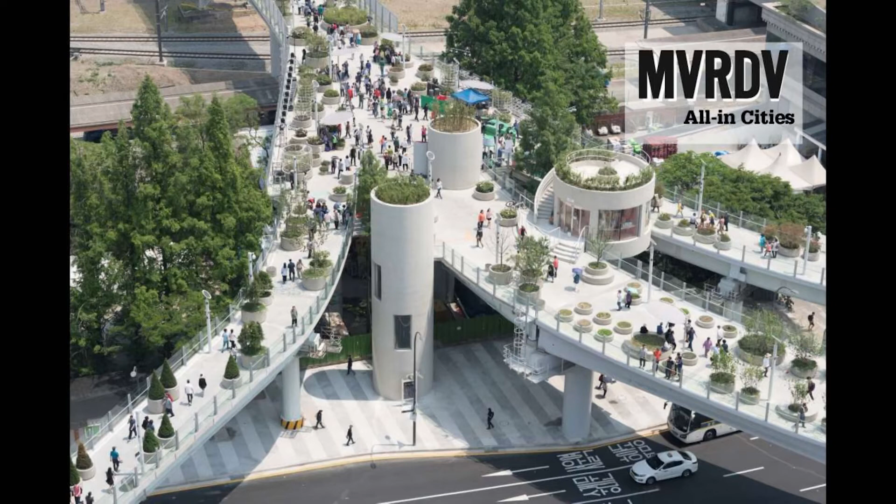Hong Kong is a world-class city, and the greatest cities in the world offer more qualities and more fundamental values that go beyond economic performance. So it's also about well-being, it's also about happiness, and this is something you have achieved.

Hong Kong already has the longest living population, the healthiest population—also extraordinary, at least for guests of the city; maybe you are used to it. You are also the most walking people. It's maybe not the most walkable city, but you use the benefits of the compactness.

But you want to take a step further, and that's part of this discussion today. It's not only about people living longer, but people being happier. It's very inspiring what is the title of the conference—it's about action, so it's a call for action. And a call for action is also a call for optimism.

When we talk about optimism, it's good to think about the impact small things can have in our society. We can fix our traffic lights, because it seems they are timed for Olympic runners. We can have more benches in the city, find places for more trees to generate microclimates, and make it more recognizable where the pedestrian way is. It's these small things that can make a difference.

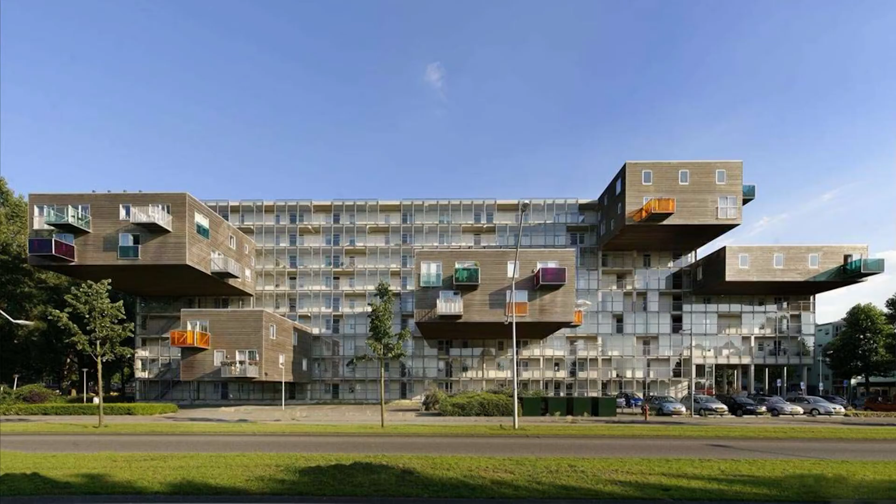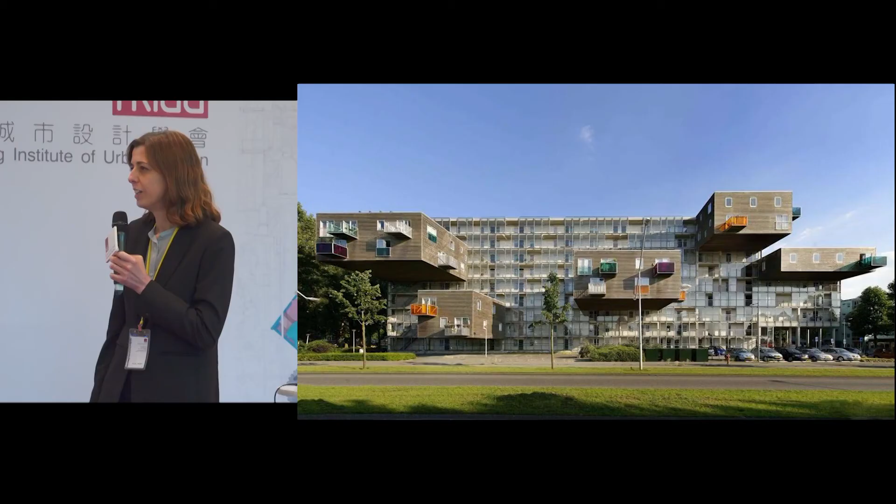This is one of our first built projects in Amsterdam, an elderly house. Many people will think it doesn't look like an elderly building. Why does it have this form? Actually, it's thanks to—or because of—the urban regulations.

First, we had a slab. The client asked us to include 100 apartments in a building for seniors. But if we wanted all these apartments to have daylight and sunlight, we had to cut part of this building envelope, so we had 9 units less.

We also wanted a larger access so it could be flexible, with activities happening there, so another 4 units went out. At the end we had 13 units less, so we proposed to the client: what if we hang those units onto the slab?

So it's looking at the regulation with creativity, trying to solve it—that's how this building came out. It's unexpected, a building that in a way tries to give an alternative to the normally monotonous buildings for the elderly. This is one of the contributions of this project.

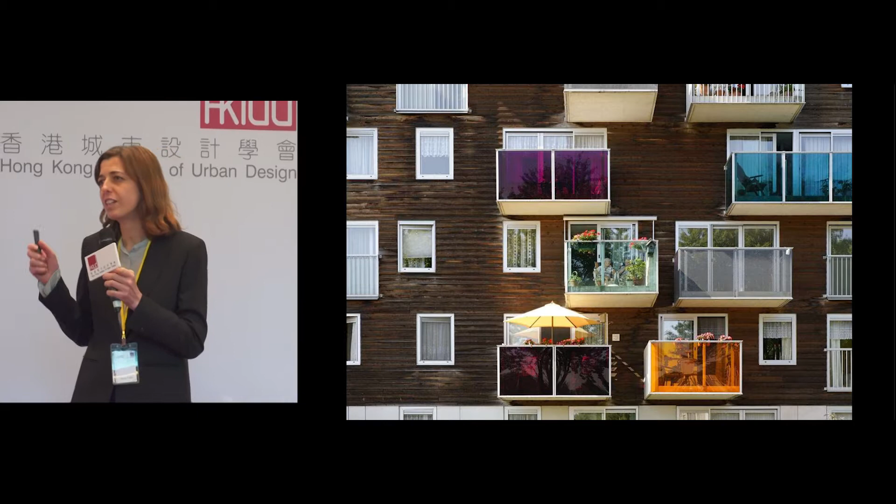If we go to the other part of the building, we see all the different balconies. The colors were chosen by the elderly people who live there.

By doing so, that is something very simple, but it brings a sense of belonging. And yes, this is the color that I like, and this is my balcony. The balconies also have different shapes. They are big enough so that it's possible to have plants there, to have a table, and when there is sun, the life goes in the balcony. It's like an extension of the living room.

And they are not one on top of each other. They are shifted, so in this way it becomes like a chatting zone. It's also these small things that generate interaction of the people, and that makes people meet even when they are in the balcony.

And from the inside, we try to make a difference in the size of the units, but there's not much that can be done. But because of the colors and the different types of balconies, when the sun shines, they give different characters to the different apartments. So again, bringing differentiation into the housing units.

So yes, this is the senior house. Here there are only apartments, because they are integrated well in the Netherlands. What we try is that the government is not a service provider, the government is more a facilitator. So here, this is a senior house. They promote that people can be independent as much as possible, in a block that is just 5 minutes from this one. Then there is the nursing house.

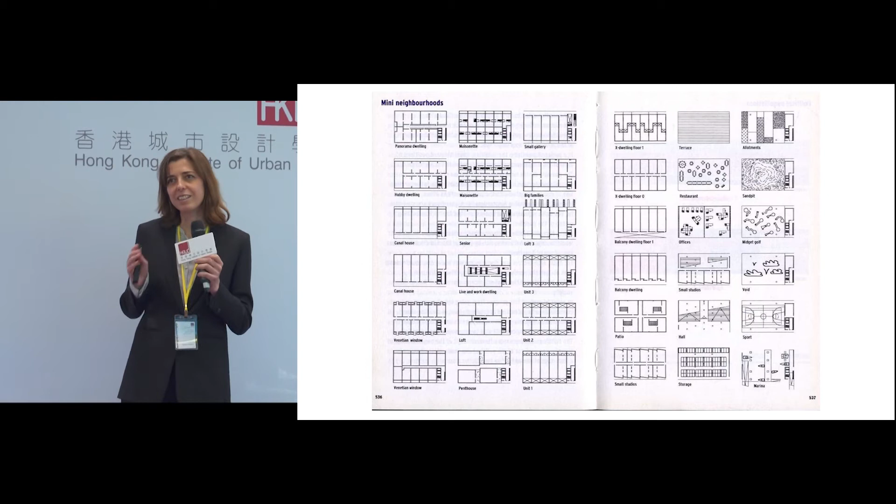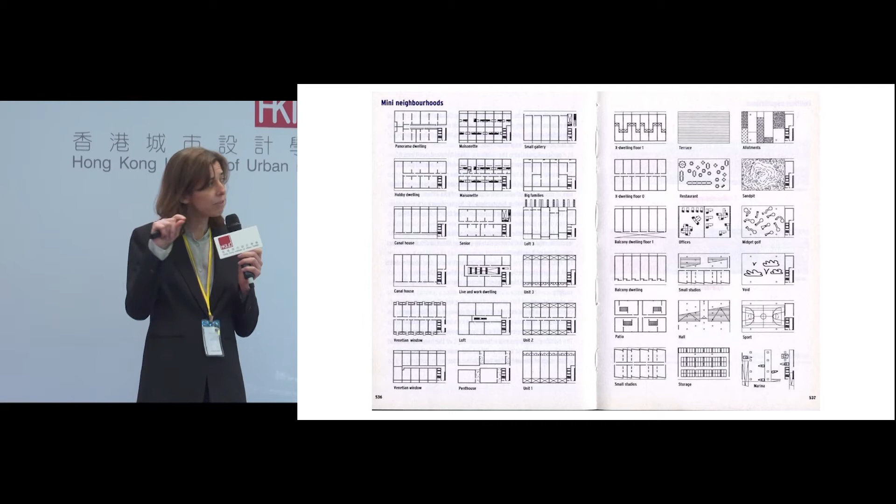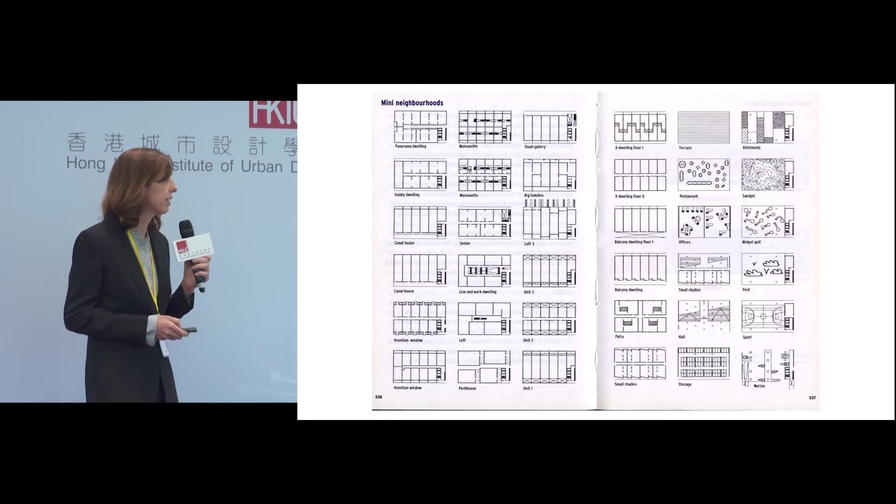So then we thought, okay, what happens if we add them in layers so that they share each of these lifestyles, they have their own corridor. But again, we thought that this could be segregation. What we really want is to maximize the mix of all these different types of people.

So what we did is to make a building that is a collection of neighborhoods. There are 140 apartments, organized in 23 different neighborhoods. When you see it from outside, you can recognize the neighborhoods. It's very clear - they have different facades, different windows, different materials, depending on the finishing and also the budget of that neighborhood. And this is the part that is for the elderly.

So what is important is how all this narrative of the different public spaces works, and where the location is in the building, and also what the scale is. So there are the big public spaces, but there are also more intimate ones.

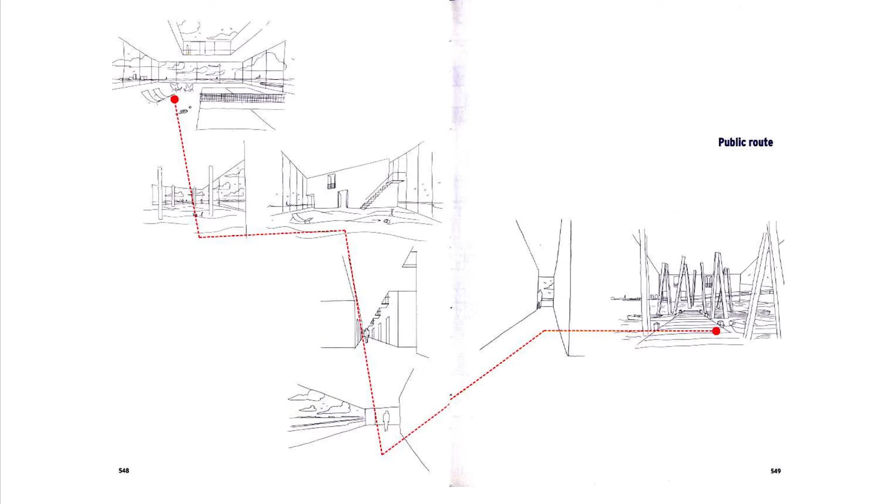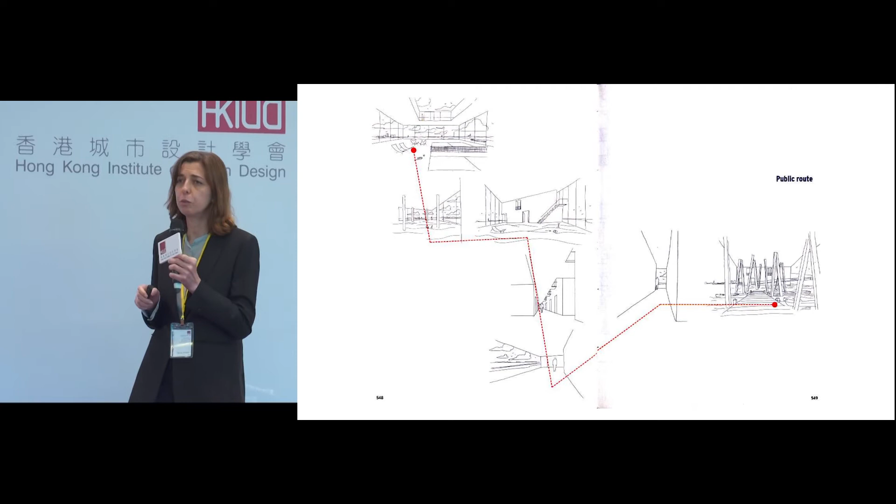Here, for example, this is also programming. There are different rooms - two rooms in the buildings, and they were empty. It's the community who decides what program is going to be there, and it's also maintained by the community. This is the entrance of the elderly part, and when you keep going, then you have this terrace.

This is a space that is very easy to make, but the fact that it faces the sun, towards the south, that it's sunny, that it has good benches, that it's well maintained with some plants - then it might really be used by the people there. So creating this meeting place and meeting opportunities is what generates this coexistence between the different generations.

Another point I would like to stress is that until this moment, we have talked about residential. In the residential domain, there has been a lot of research. Maybe in retail, there has been less research on what is aging. But when we think of the public realm, yes, it's the street, the roads, but also the libraries, the civic buildings, also internet. This is a wider understanding of what the public realm is.

Many times when we talk with elderly people, they feel insecure. They feel invisible in this type of building, and they just stay at home. I'm going to present now a project that is actually about connecting people, and it's about another type of program. In cities, we had for many decades this kind of environment.

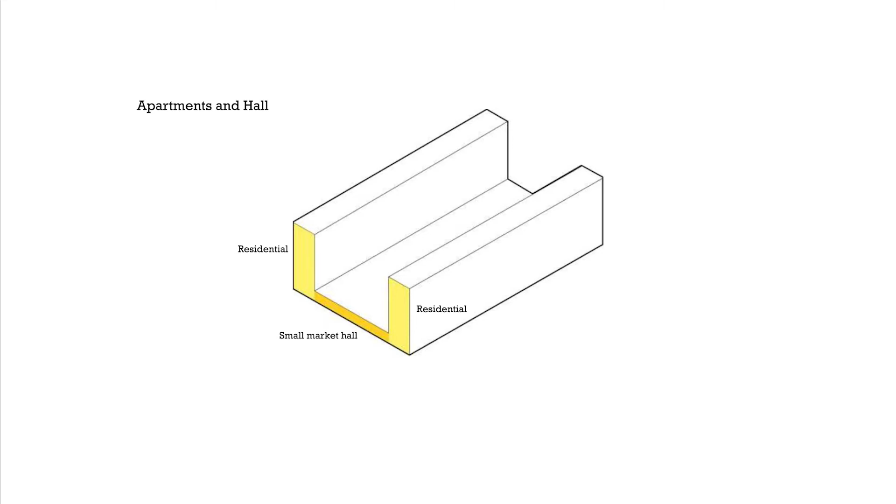For aesthetic reasons, we have to make an arch because there are elevators inside this arch for the housing. Then we need to strengthen the legs. And here is how the market hall appears - it's a simple building to understand.

You know what it's about. It's a place that is safe, easy to navigate. It's like a covered street, and when you enter inside, it has the small scale of the market with this grandeur of the roof.

It's a place that has become the living room of the city. At the end, it's not only for the neighborhood, but it has been the city who has embraced it. Yeah, and it's welcoming and it's attractive. It's safe. The elderly, they go there in the morning. You can take a coffee in the afternoon. In the evenings, young people go there to have a beer, go shopping. So it's a place where everybody finds something to do.

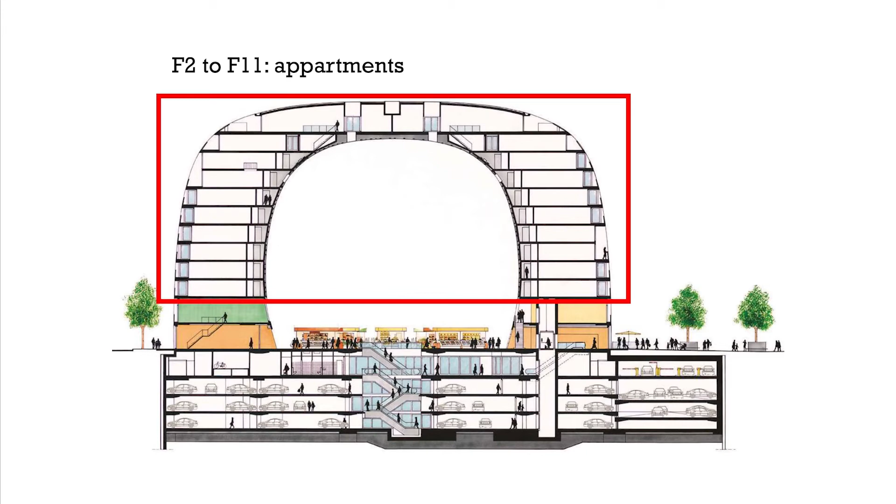So this welcoming and attractiveness of the buildings is for all, not only for the youngest, not only for the middle age. And when you look on the top, you have here the ceiling with the windows, and these are the windows from the apartments that are behind. There's these 10 levels of apartments on the top, and there's always this constant connection with the market.

So it's a building. It happened also that actually most of the apartments, they are being rented or sold to people that are in their 50s or 60s. So people that are aging, and it also has to do with this connection that they feel. It's a building that has been done to connect people, and through that, what we have investigated is how to connect the different programs. So yes, it's a project that we hope is fostering the community, but creating a space that is simple, a space that is easy to understand, and that people can feel safe there.

It has been mentioned before that the public realm influences our daily life, and this is especially relevant for elderly people. In the last decades, the cars should be very happy because all the cities have been made for the cars, and we are the ones who live there. But the good thing is that actually there's a collective effort, and we can see that in the city they are appreciating more the benefits of not only building for the cars, but of course taking the people into account.

In this global effort that's already going on, Seoul is also part of that, and during the last years there have been several projects that have attempted to transform a city that was dominated by cars to a city that is dominated by public space. Different initiatives have been done, and the project that I'm going to explain now is also part of this initiative. This is an overpass near the station, and we were asked to transform this car overpass into a public space.

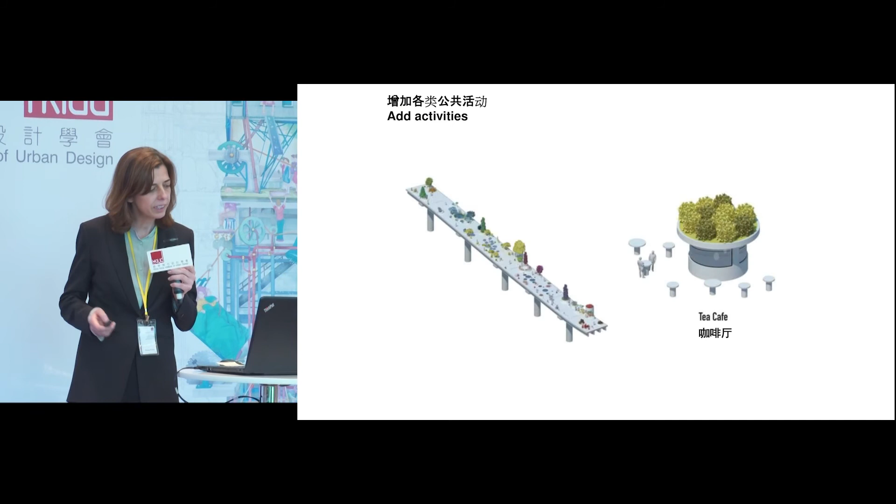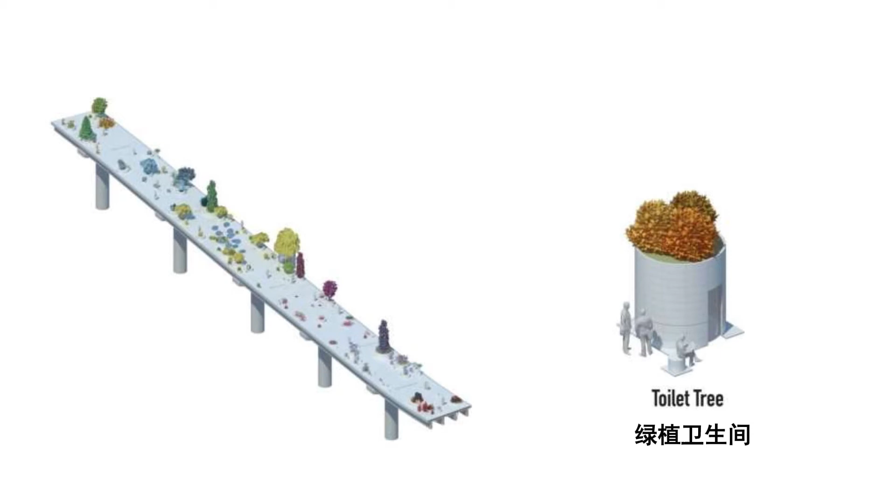Have the tea, coffee, a flower shop, it's a street library, there are toilets, so a variety of them. This is a city that was dominated by cars, and what we try is to give it back to the people.

Providing a place that is dominant by the human scale, and also where people can feel safe. And we create this kind of botanical promenade. The things that we take into account in the design was, of course, accessibility, to bring the human scale, and also to find what were the proper programming for the area.

When we talk about the elderly, the details are important. The slope, so that they feel comfortable to go, but also because this is 1 kilometer, it has to have every 300 meters escalators, elevators, so they feel that they can go out when it's needed.

It's also connected through the buildings next to it, and there are a lot of seats. Every 10 meters maximum, there are always benches, and when they sit there in the benches, they can also read what is the plant that is there.

This is some of the activities, the cafe where they can sit. This is the toilets, also all along the bridge. We try to create a microclimate with the trees that are there. They asked to have these viewer points, so we give them four of them.

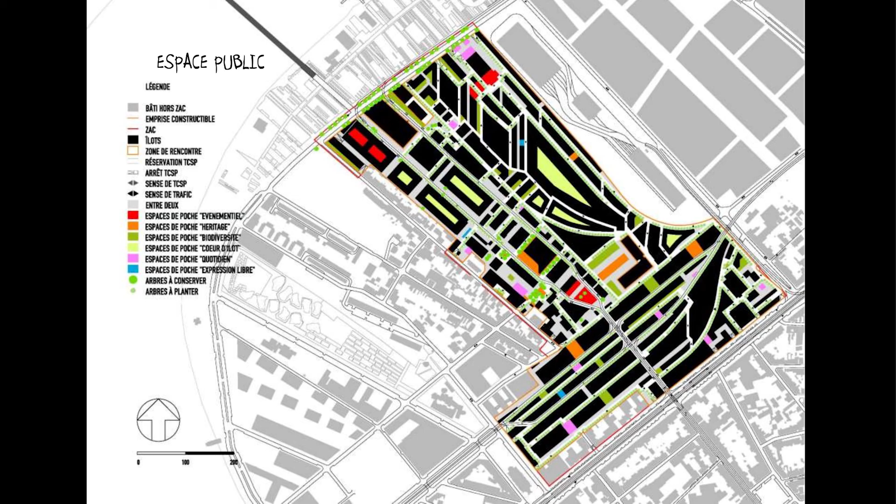And there are 70 different pocket gardens. All of them have different characters. There are ones that are alone standing, ones that are close to the buildings, inside of the buildings, and depending on the program they have, if they are close to the library or to the kindergarten or to the housing, they have a different type of programs or different types.

And what is also remarkable about this project is that after a lot of discussion with the government and also with different stakeholders, we created this kind of street in which the priority is for the people, not the car.

So the cars can go only, there's parking all around, so the residents park around in the site, but if they have to go inside for drop-off or to bring the groceries or whatever is needed, then they have to go maximum 20 kilometers per hour. This needed a lot of discussion with the government, with the commerce there, but at the end, it was possible.

So yes, going back about the little things: we need places, we need better traffic lights, we need more benches, greener, more diversity, more distinct spaces, sharing, more diverse, more connected, that is more attractive, that is also more safe, that is more intimate, that is more democratic. So these small things make a difference.